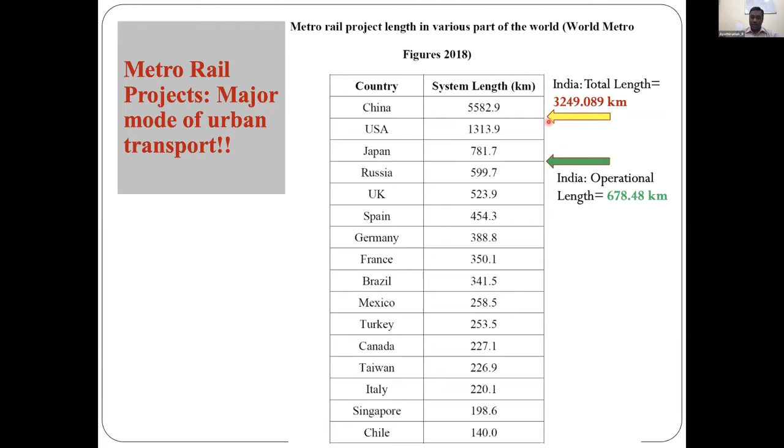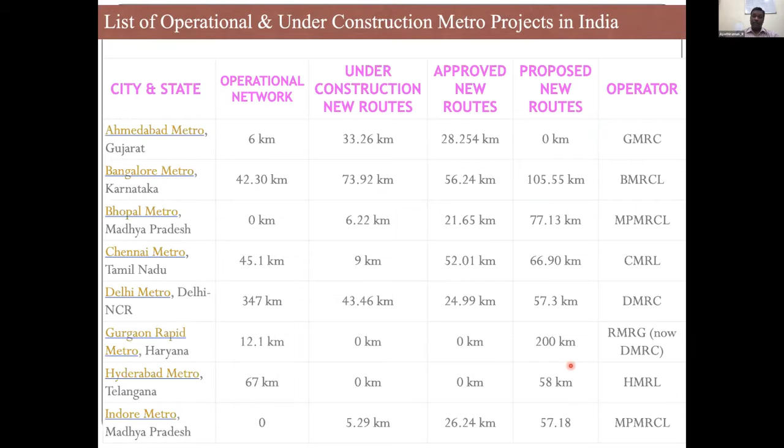This is the table summarizing what is operational and what is under construction in several metro cities, and the approved and proposed ones. I think the government, even in the recent planning and budget, you can see a huge amount of fund has been diverted for metro construction. These are different cities showing the status of the work, and some of these cities are going to be having metro projects for the first time.

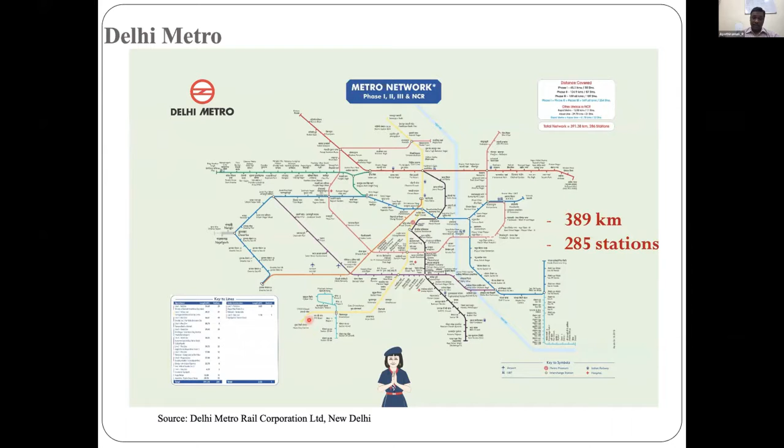So in Delhi, very successfully it is functioning. 389 kilometers of metro is functional, and especially there are several lines where underground tunnels were constructed. These metro transport systems can be elevated or underground. I think elevated is the very convenient way of construction, cheaper, whereas underground construction is the most challenging. But it is unavoidable to have underground metro construction because you can see very densely populated residential areas, so obviously you have to take this metro underground, below these buildings.

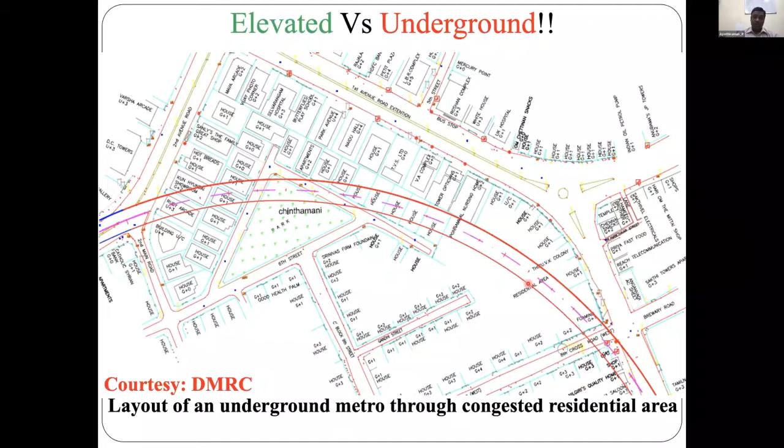The typical underground soil conditions require tunnels to be constructed either in soil or partly in soft rock conditions. In Pune, it is also constructed in hard rock conditions. So eventually, we are talking about tunneling in soil as well as rock conditions.

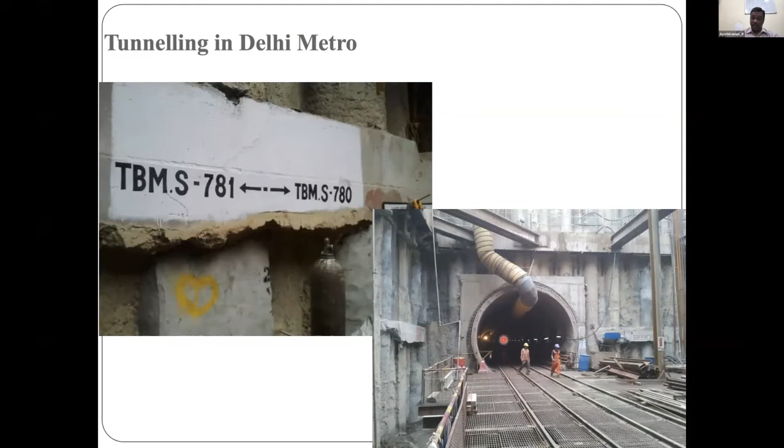This is some of the photographs taken during the site visit to Delhi metro constructions. You can see the portal, and from the portal, the tunnel construction is done through TBM. This is the TBM components, the face of the TBM, and a complete earth pressure balancing TBM is used. The complete tunneling is monitored by a computer control system.

It monitors what is the volume loss, how much face pressure has to be applied, and how much volume loss is happening. As a result, the settlements are to be monitored at the surface, and the segmental linings are to be installed by jacking.

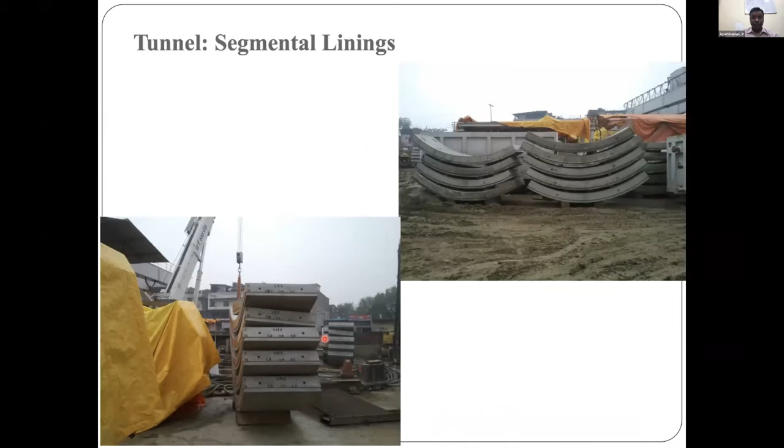So the major challenges we have in urban areas, since we are doing the tunneling underground, are that structures above ground and their foundations come in close vicinity, so we need to take care of their safety. There are two possible scenarios we can look at. One is during tunneling, how much damage would happen to the surrounding buildings and other subsurface structures and utilities, which we need to protect.

But now you can see so many projects have already become functional. The other possible scenario is that these tunnels exist, and these tunnel and metro alignments have become a major point of attraction, so a lot of future development happens close to this metro alignment. Eventually any new construction activity can also cause an effect on the performance of the existing tunnel. So we need to also assess and ensure the safety of the tunnels after construction.

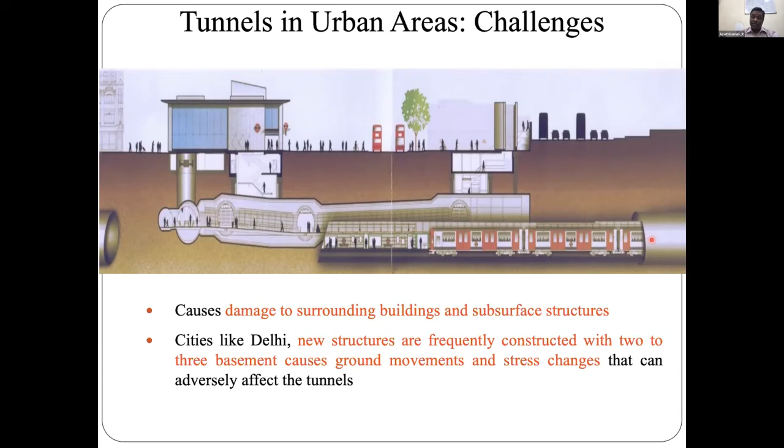And if these tunnels are located in a seismically active region, then their interaction under seismic load also needs to be understood and designed accordingly. Nowadays buildings with basements are coming, so eventually they will also come to relatively deeper depth and can have an interaction with the existing tunnel. So we need to study the interaction of the shallow foundation also, under both static and seismic loading.

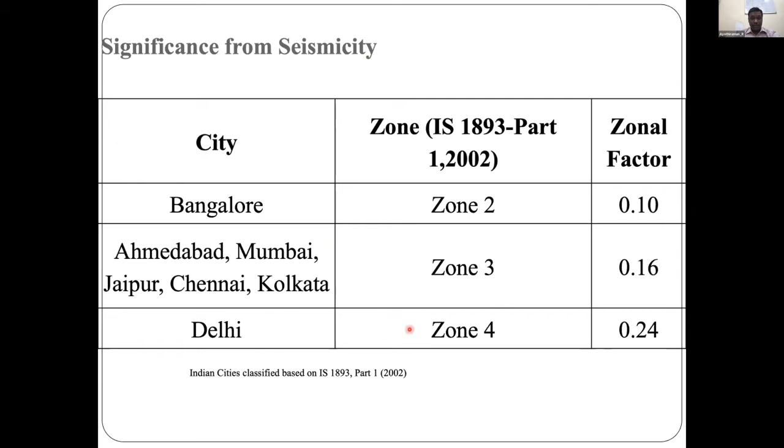All of us know in India what is the significance of seismicity. Some of the cities where metro are already functional come under zone 2 to zone 4. Delhi comes in zone 4 with a zonal factor of 0.24.

What is the current state of practice with respect to tunnel design and its relevance? Generally people assume that tunnel structures, underground structures, are relatively safe compared to surface structures when subjected to earthquake load. But this has become a question, because there are several case histories where earthquakes have caused significant damage to underground tunnels as well.

Let us see some of the case studies highlighted in the literature. It is reported that these are the parameters that affect the seismic response of tunnels: the relative stiffness of the liner and the tunnel depth, the peak ground motion parameters of the earthquake, and the duration and predominant frequency of the earthquake. These are the critical parameters affecting the performance and damage of tunnels during earthquakes.

There are 192 cases of tunnel failure that were analyzed and reported by several researchers, and we will see the summary of that.

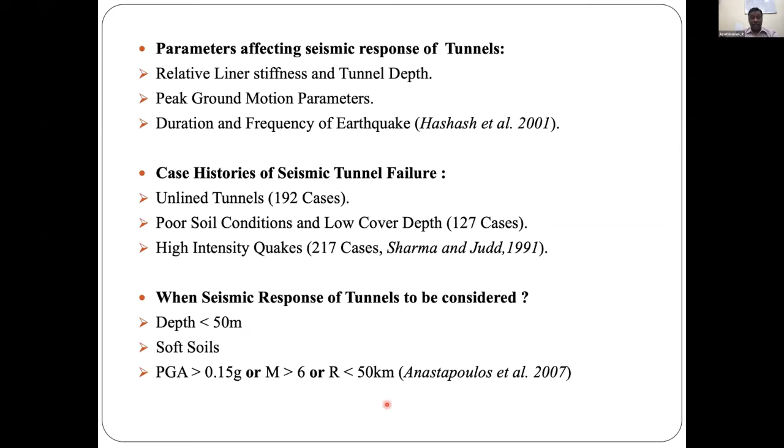Typically, when to consider the seismic response of the tunnel and take it into account in the design is whenever the tunnel depth is less than 50 meters, typically in soft soils, and if your PGA is greater than 0.15 G, or magnitude is greater than 6, or your epicentral distance is less than 50 kilometers, then we need to take into account the seismic design of tunnels.

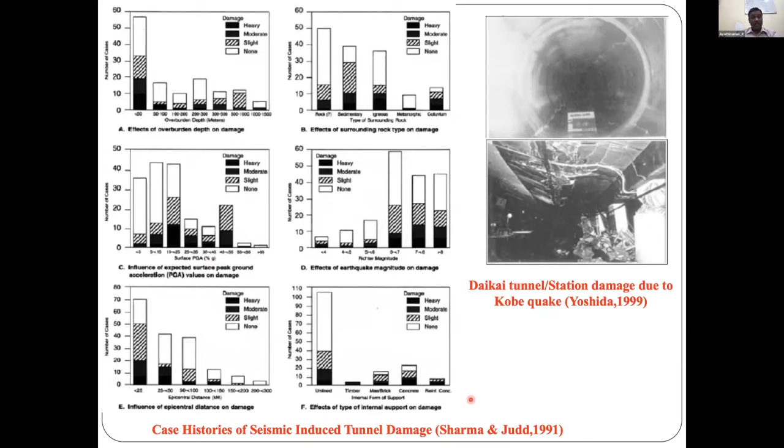These are case histories which were analyzed to find out the causes of damage, whether it is the effect of overburden depth, the effect of surrounding rock conditions, the magnitude of the earthquake, how it caused damage to different tunnels, and the influence of peak acceleration value on damage, and similarly epicentral distance. All these were categorically discussed by Sharma and Judd 1991. This clearly shows that tunnels do undergo damage during earthquakes, so we need to design them accordingly.

So this is what I would like to again summarize: what are the different possible interactions that can occur. Of course, when you construct a tunnel in soil, that soil-tunnel interaction needs to be understood even under static load. But metro tunnels are typically at close distance, they are twin tunnels, so therefore the interaction between the adjacent tunnel also needs to be understood, because the in-between soil, what we call pillar width, plays a critical role in affecting the interaction between the tunnels.

And of course, subsequently, there are other two types of problems. Type 1 problem is where a tunnel is constructed, then what is the response to the existing foundations? Type 2 problem is where the tunnel is existing and there are new construction activities, whether it could be excavation or foundation loading, and how they will affect the response of the existing tunnel. And of course, when in seismically active regions, how the earthquake loading needs to be considered.

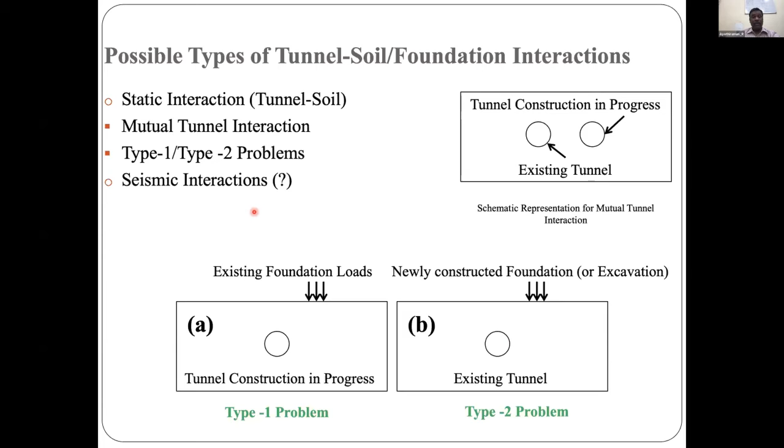So today's presentation, I will mostly focus on the seismic design related issues, not the static interaction part. The most common methods adopted in the analysis of underground structures are the quasi-static analysis, considering the free field method assumptions. There are also closed form solutions given by Penzien and Wang, which can be used for a circular cross section of the tunnels.

And of course, quasi-static analysis by the racking method, considering the deformations, can also be used. And obviously, we can do a numerical analysis incorporating this quasi-static approach as well. And then a time history full dynamic analysis can also be performed.

So today we will be discussing the case study of Delhi Metro, starting from a pseudo-static approach to quasi-static approach and then a full dynamic analysis. We'll be talking about how different methods can give different results and which one would be most appropriate to use. That's what we are going to discuss today.

Of course, in tunnel design, one important factor we need to understand is the flexibility ratio, because it represents the relative stiffness of the tunnel lining and the surrounding soil. So that plays an important role.

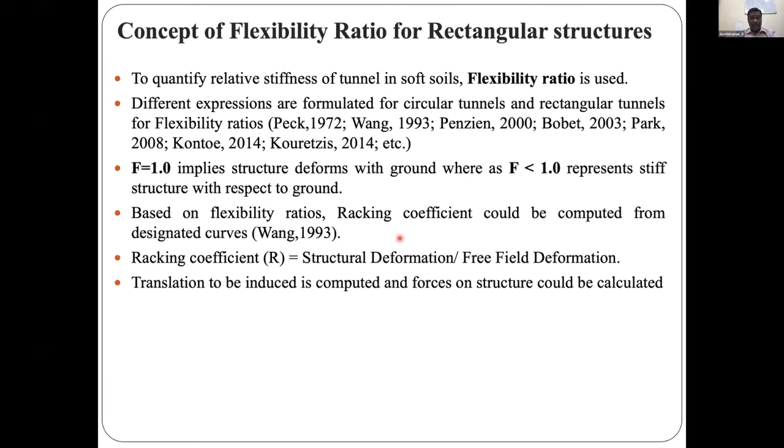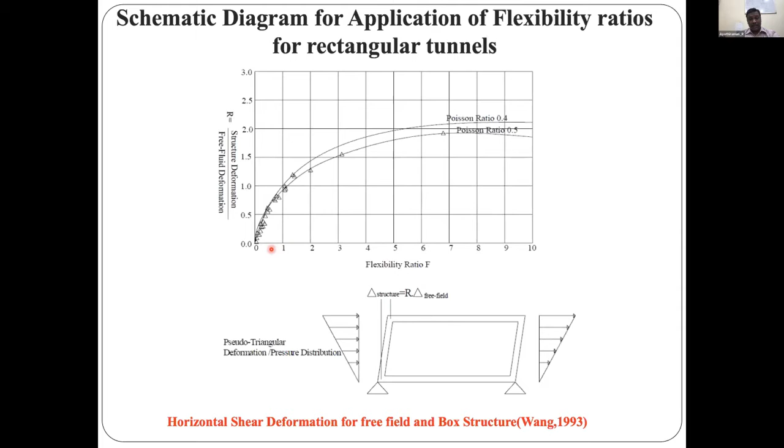In fact, a reduction factor or racking coefficient is applied when we do the analysis and design using the free field deformation approach. The structural deformation to be applied for the racking analysis is obtained by multiplying the free field deformation by the racking coefficient, and this racking coefficient is a function of the flexibility ratio.

Another challenge is the segmental lining being used, which has joints. What would be the effect of these segmental joints? For a realistic analysis and design, one must model in the numerical analysis the joint condition as it prevails in the field.

Nagar has actually done an analysis and found that joint stiffness does affect the moment and thrust mobilized in the tunnel lining. Therefore, in our Delhi Metro analysis, we did consider segmental joint modeling in the analysis.

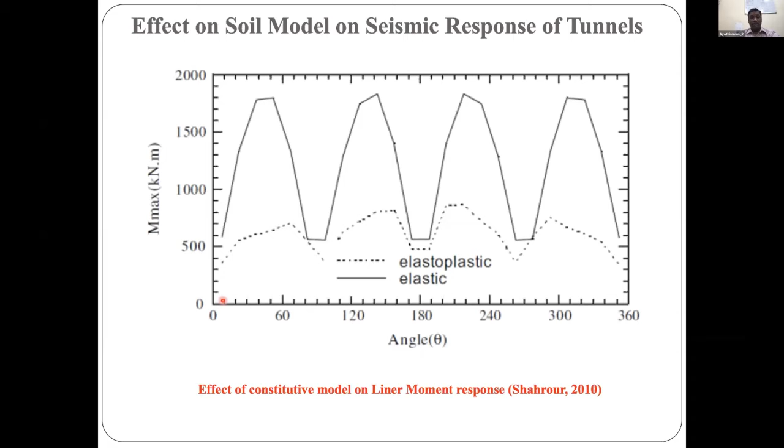Also, in soil engineering problems, simplified elastic analysis or elastoplastic analysis - the soil constitutive model - affects the final output of moment and thrust coming on the liner. So we have to choose very judiciously the constitutive soil model depending on the actual soil condition, to more representatively

model the behavior. Some full dynamic analysis results reported in literature show that as the PGA increases, both axial thrust and bending moment on the lining increase. But again, this thrust and bending moment need to be reduced depending on the flexibility factor, because flexibility is one of the important factors - they can be reduced based on the flexibility value.

Delhi, having certain parts with a shallow water table and sandy soil condition in the Yamuna River basin, is liquefiable. So we had to arrive at different constitutive models for liquefiable and non-liquefiable soil conditions. Again, these parameters have to be site specific, and for seismic loading we also have to get the damping characteristics to be very representative.

Of course, the challenges are how to arrive at the site specific ground motion characteristics, and how we are going to simulate the segmental joints in the modeling. Also, you should be able to ensure face stability, which is actually obtained in the TBM machine by applying appropriate face pressure.

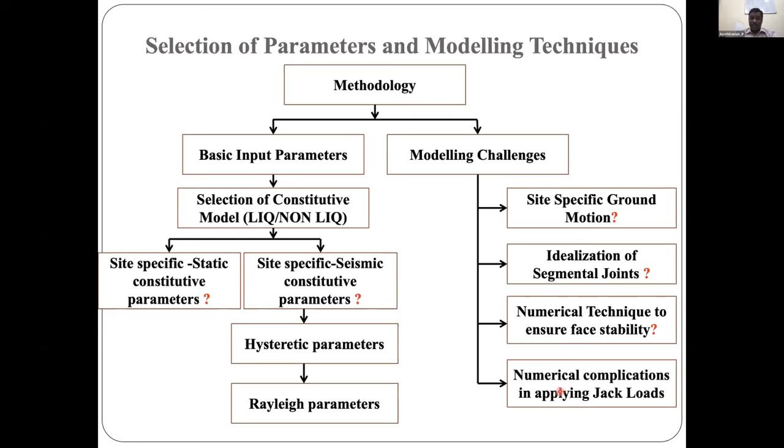So these are the things we have actually simulated as close to the field condition as possible in our analysis and design. Of course, we have to arrive at these parameters, because most conventional geotechnical investigation reports will have only SPT profile.

And we did have a shear velocity profile for the Delhi region at select locations, but if not available, then we have used correlations to convert from the SPT value to arrive at the shear velocity profile.

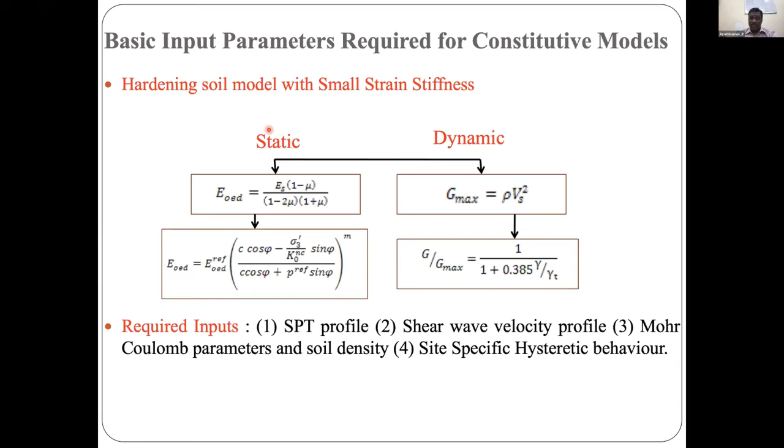So we have used the hardening soil model with small strain stiffness for Delhi soil conditions. The other dynamic characteristics were obtained from the Hanumantrao and Ramana equations, developed for the Delhi region. And the hysteretic behavior was assumed using the lower bound sand given by the Seed solution - these are some of the properties used.

So we have actually idealized the whole of Delhi into three types of idealized soil profiles for which we have carried out the analysis. Another thing is, instead of going for a zonal factor for a time history analysis, you need to get artificial ground motion which is synthetically generated.

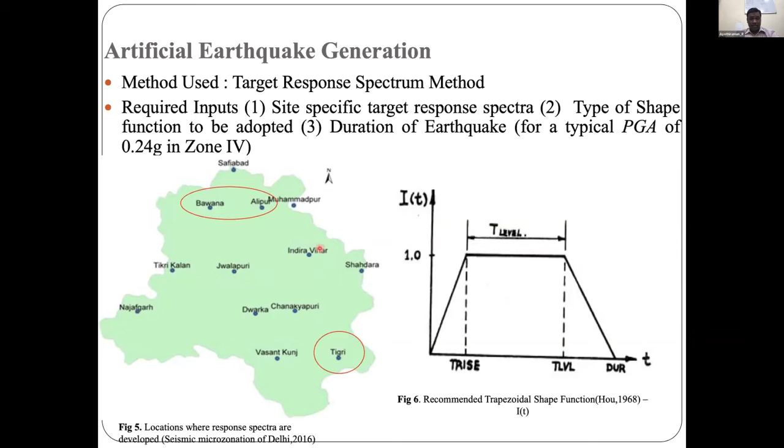So for that, we have used the target response spectrum method for developing a synthetic ground motion for the Delhi region. We have used the NDMA guidelines, considering the Bawana and Tigri faults, and developed the synthetic ground motion time history. For a particular target spectrum, we are able to closely match the ground motion giving the same response spectrum.

This synthetic ground motion was eventually used in the time history analysis. We can see how the face pressure needs to be obtained for different cover depths, because as the cover depth increases, typically the face pressure required to be applied increases. And when the face pressure increases, the face displacement will reduce. The idea is you should apply a pressure which will have a minimum face displacement, so that the volume loss is restricted to a limiting value, so surface structures are not affected.

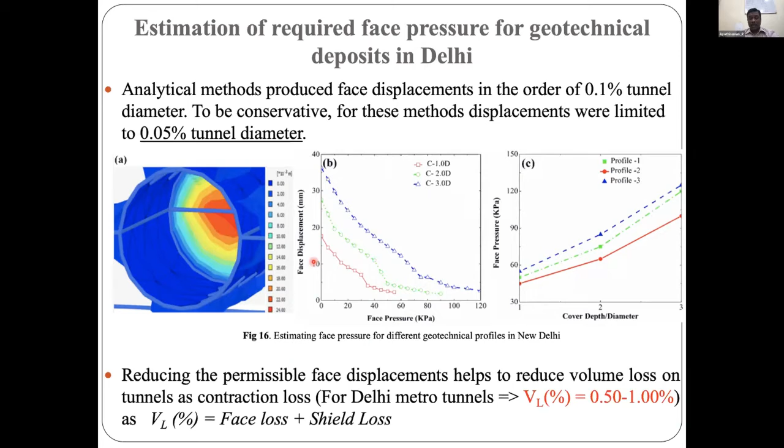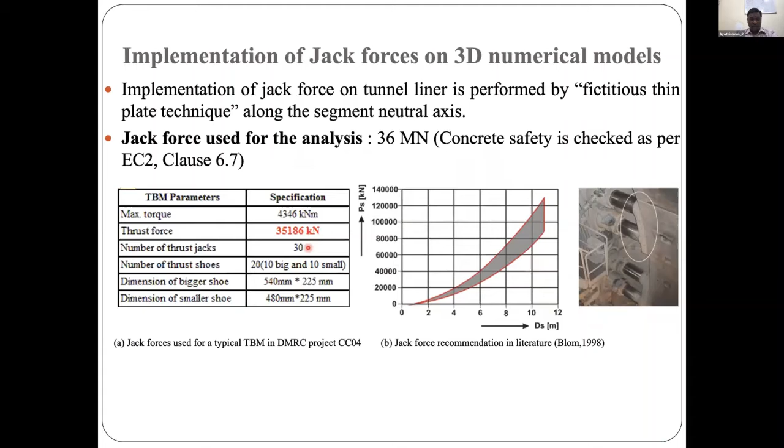The jack force applied in Delhi Metro was quantified based on the recommendations of Blom. We also verified how much jack force they are applying in the Delhi Metro conditions, which is almost 36 meganewtons.

We initially started with the free field analysis, and in Delhi, the bedrock varies from 10 to 80 meters, which is quite significant. Finally, we analyzed three different bedrock conditions. This shows the shear stress variation with depth for different bedrock conditions.

Again, for different ground profiles that we idealized based on a large amount of geotechnical data, we can see how the shear strain varies with depth. We can also see the spectral acceleration at the surface versus the spectral acceleration 7 meters below the surface. That's why the underground structures experience relatively less spectral acceleration.

That's why they are normally assumed to be safe. For the Delhi region, the actual acceleration based on the synthetic ground motion falls well within the design spectra. But this is for the free field condition.

The moment we bring in the tunnel and foundation system, they behave in a totally different way. So initially, pseudostatic analysis was done as per IS 1893.

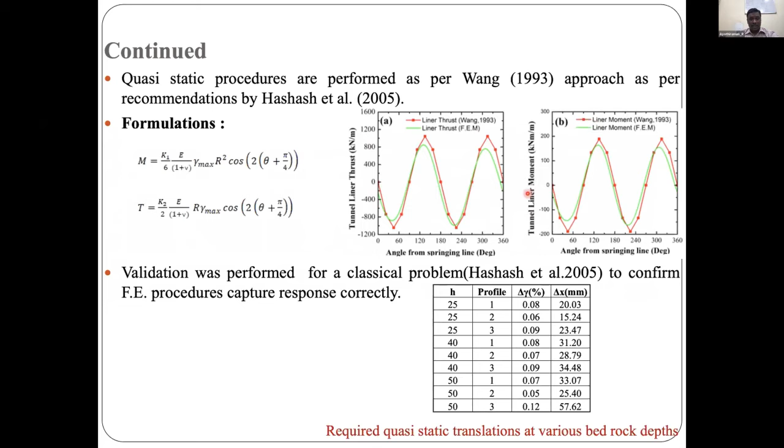We also did some validation problems comparing the Wang solution and the Hashash solution. We can see that the liner thrust and bending moment obtained were comparable with the Wang solution. This shows that the numerical analysis is capable of capturing the tunnel lining behavior.

You can compare the pseudostatic bending moment applied and the quasi-static analysis. We will always find that pseudostatic gives much higher bending moment. They always give very conservative forces.

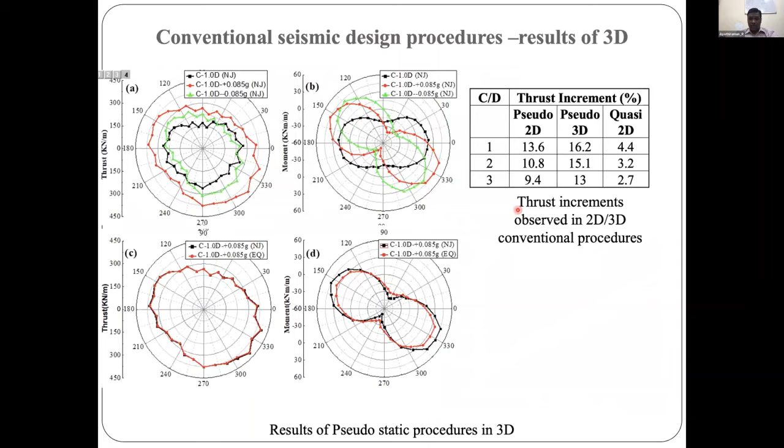But there are other challenges which need to be cautiously monitored, which we'll discuss in subsequent slides. We can see how the thrust forces using pseudostatic 2D and pseudostatic 3D can vary, but the moment we go for the other approach, it's relatively less.

Coming to the full dynamic analysis, we have to do the modeling as per the conventional explicit method of analysis, choosing the dimension of the mesh and everything. We can see the increase in thrust with time, but overall there is not much increase in the thrust force and moment considering the dynamic force.

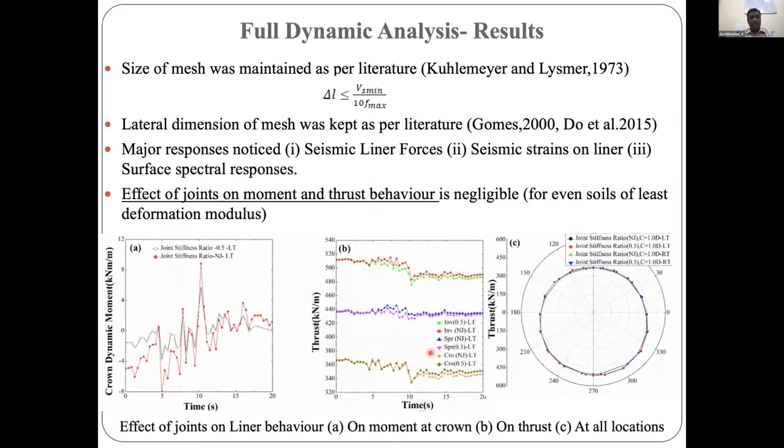Even the effect of joint stiffness is not significantly affecting the forces. So for practical purposes, the joint stiffness condition can be neglected for a quick analysis and design. You can see that the increase in thrust is hardly 3 to 5%.

But of course, when you do sequential tunneling, the variation for the two different tunnels is not the same. They have different forces, both moment and otherwise, not exactly the same. So you have to simulate the twin tunnel construction sequence in the modeling as well.

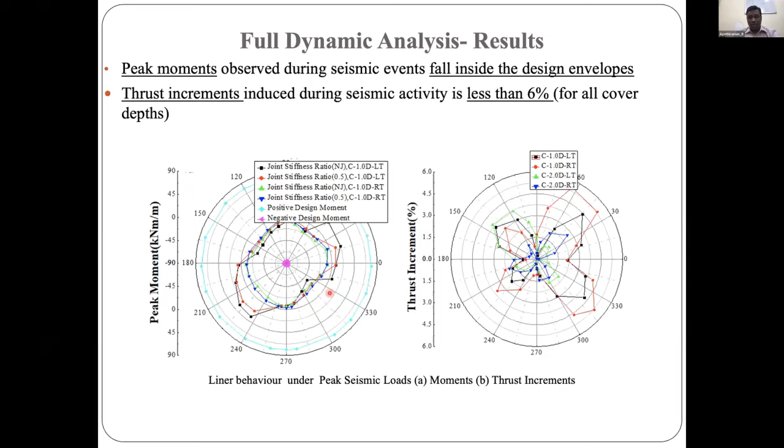So the major finding is that the strain level on the lining needs to be monitored. This is clearly seen for different cover depths. When it's a shallow tunnel, the strain on the left and right tunnels is well within the concrete limit. As the depth increases, they become comparable, and at a deeper depth, both left and right tunnel strains go much beyond the permissible limit specified by the IS code.

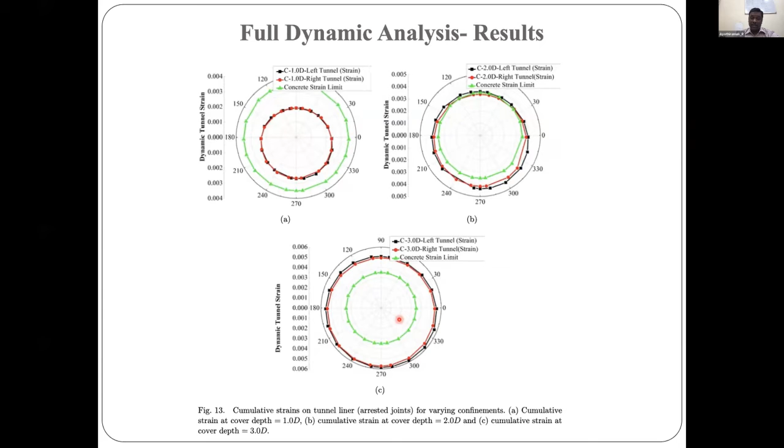So we have to be really watchful, depending on the geometrical conditions, about where to place strain monitoring. Whenever the strain levels are alarming, we need to determine what remedial measures should be taken. So this is something we need to worry about.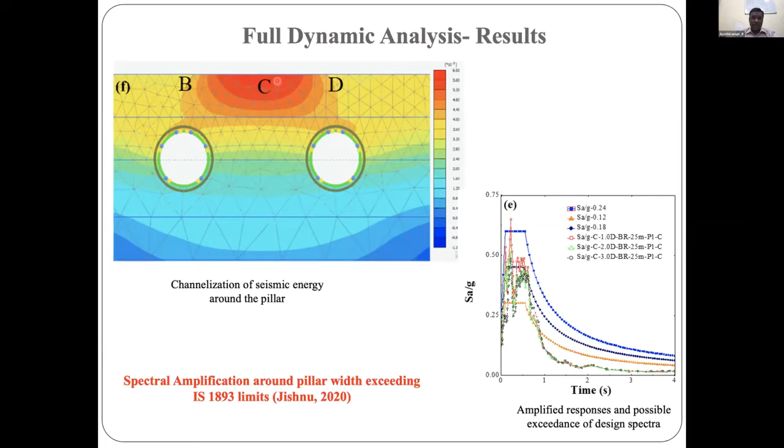Another thing is, while accelerations are well within the IS code specified spectral acceleration limit, under the presence of a tunnel there is channelization of seismic energy, and we find that the acceleration in the pillar width region has exceeded the IS code spectra. That means any structures located between tunnels need to be designed for higher spectral acceleration. If you simply follow IS code guidelines, they may be in danger. So we have to be watchful when designing structures in the pillar width region between tunnels.

We then went further to study the interaction of the tunnel-shallow foundation system, simulating different geometrical sizes and foundation aspect ratios. We can see that under the presence of a tunnel, since the tunnel is a stiff member, the load capacity increases, so there is an increase in bearing capacity.

So as such, if you neglect the tunnel, you remain conservative in terms of bearing capacity. But if you want to economize the design, you can always account for the presence of the tunnel and consider an increase in bearing capacity as well.

The only thing is, during excavation there is a sudden increase in settlement on the footing. But after the tunnel is constructed, there is again an increase in capacity compared to the load-settlement behavior without a tunnel.

So during tunnel excavation, one has to be careful that settlements don't increase excessively. But if the tunnel is already there and you're constructing a foundation afterward, we need not worry. The green line shows post-tunnel construction, where you can see how the bearing capacity increases significantly compared to the no-tunnel condition.

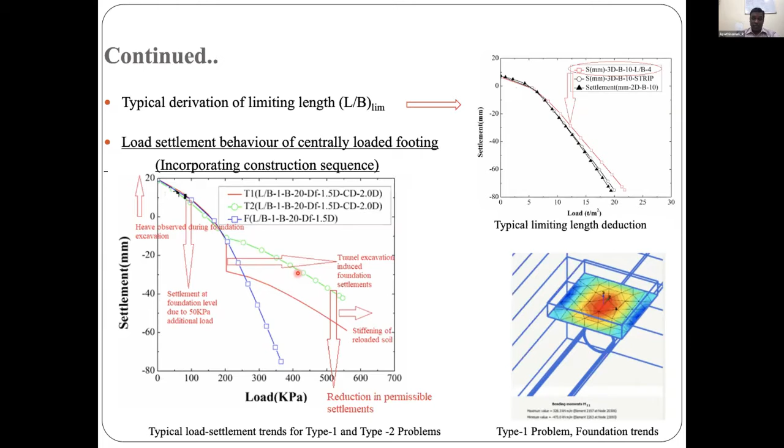So if you're interested in taking advantage of the tunnel, you can do that, but you need proper numerical simulation to estimate it. As mentioned, the bearing capacity increase is a function of the depth of foundation as well as the geometry of the foundation. But by and large, a 40 to 60% increase in bearing capacity could occur because of the presence of the tunnel.

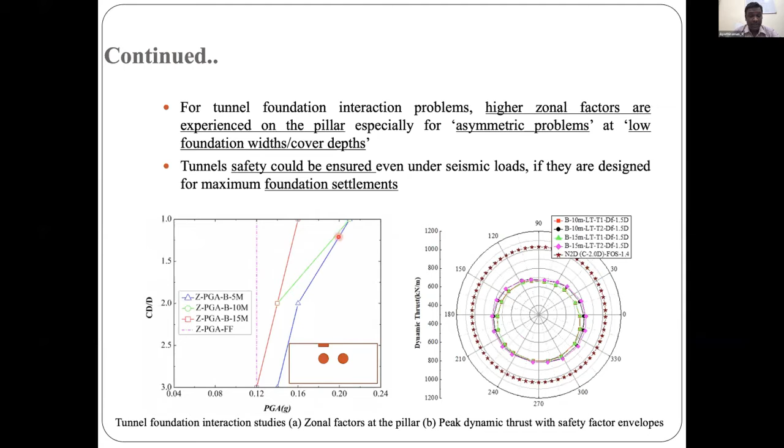When it comes to dynamic load, we can see that the free field acceleration is somewhere here. But when the shallow foundation is there, in the vicinity of the tunnel, we see that the acceleration gets amplified, especially at a shallow tunnel condition. You see that the maximum acceleration is there.

We also studied the tunnel-pile foundation interaction problem with no loading condition, meaning only pile and tunnel are present. We also considered vertical load on the pile, lateral loading on the pile, and pile group configurations, so different scenarios of field conditions were modeled. We assumed a 1 meter diameter pile, which is most commonly used these days, for which a permissible vertical settlement of 12 mm is used, and a lateral deflection of 10 mm is used. We had only modeled the pile up to the invert of the tunnel, because beyond which the load distribution goes much below the tunnel, so the interaction may not be significant.

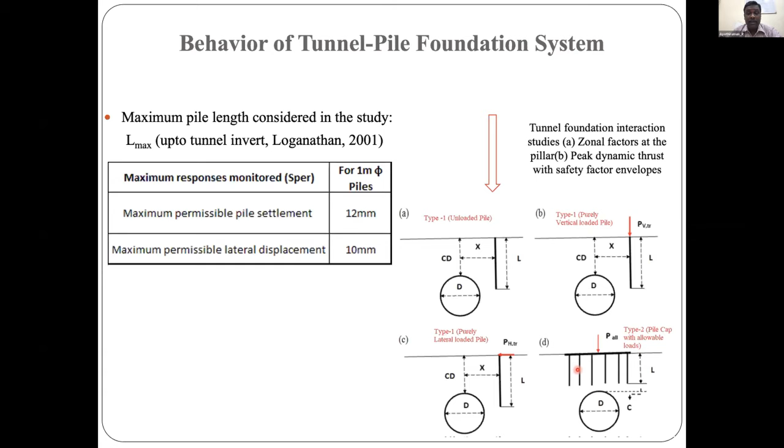Also, for seismic loading, for pile group, the permissible settlement of 25 mm as per IS code was used. We also did a validation problem by comparing field data reported on pile behavior. It is found that there is a large displacement around the pile and tunnel for a certain distance, and they are typically well within the 45-degree line from the springing line.

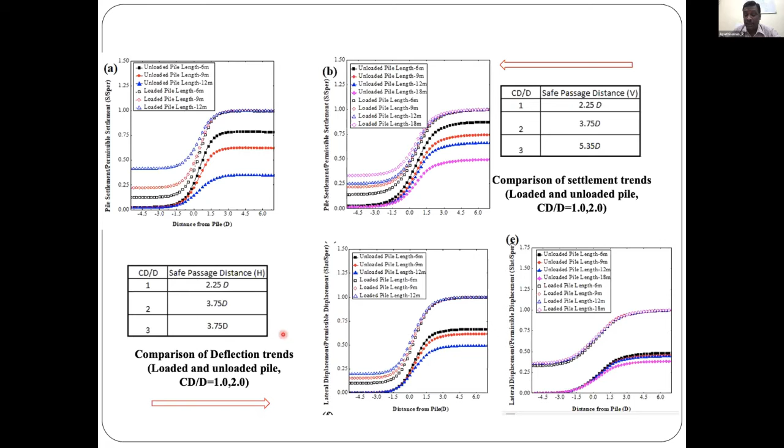We have plotted a normalized pile settlement curve with the distance from the tunnel, and distance between the tunnel and pile. We can see that when the distance is small, the deflection starts increasing, and then reaches the full settlement value. Similarly, for a loaded condition also, they reach the maximum settlement. So the critical distance for different cover depths was established. Obviously for a shallow depth, they reach maximum settlement at a very close distance. At a deeper depth, because of confinement, maximum settlement is reached relatively at a longer distance between the pile and tunnel.

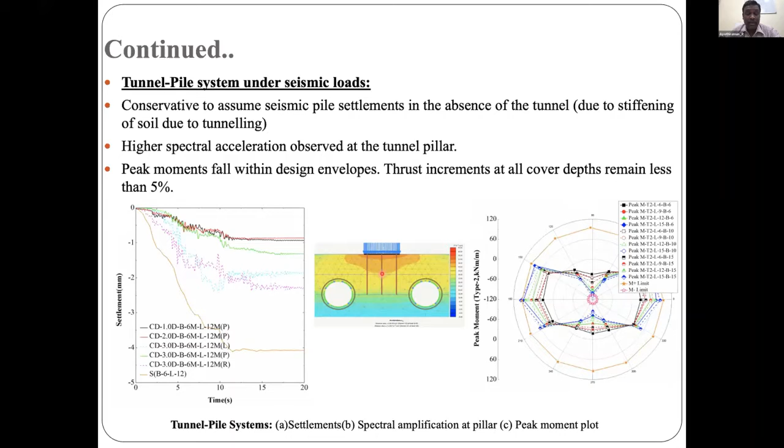The same channelization effect is happening. The spectral acceleration in the pillar width area is increasing. As a result, although settlement is less, the forces coming on the tunnel, the pile, and the pile group are increased. Therefore, we need to check the pile design for these additional inertial forces that are coming in the pillar width area, so that one has to check.

To summarize, we may use pseudostatic methods, which are most commonly used in industry, which may be conservative in giving the liner forces, basically thrust and moments. But the challenge is it cannot give the time variation of these forces, and especially strain and displacement, other things cannot be predicted by this method. So although it is conservative, with respect to deformation and strain, it doesn't give any information.

We may use the closed form solution as well for a typical cross section of circular tunnels by Wang, but the Wang method seems to give a better solution compared to the Penzein method. So for ideal cross sections, we may use the Wang solution as well.

Of course, the full dynamic analysis is always more rigorous, and it can simulate the realistic conditions and all the construction sequences. But again, your result accuracy is a function of how accurately you are modeling the site-specific ground motions, what appropriate constitutive model you adopted, and how accurately you have simulated the construction stages. Accordingly, your results will be varying.

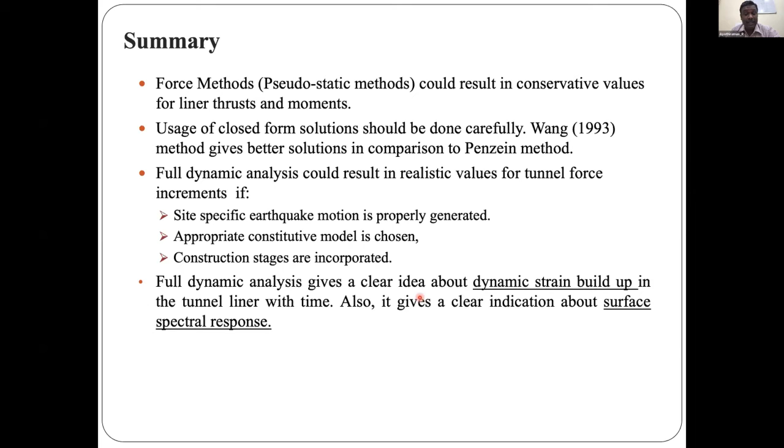But the most critical output that we have found is that the dynamic strain is actually increasing for certain geometrical conditions and loading conditions, which is really alarming. You need to monitor the critical sections identified, and finally, whenever the strains are increasing, we may need to go for appropriate remedial measures to be adopted.

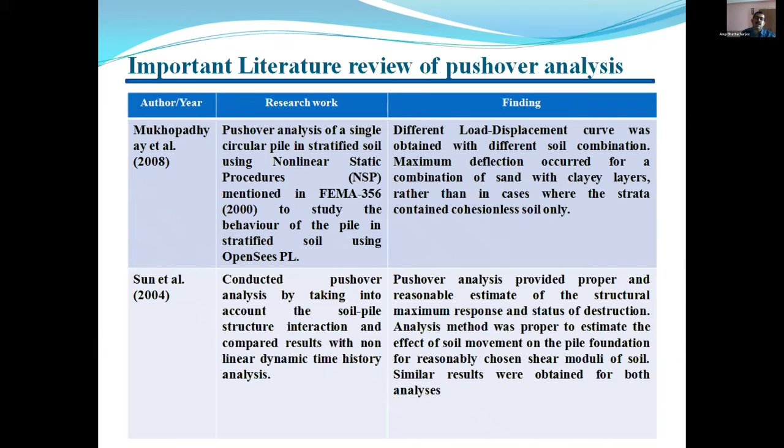Sun et al. compared pushover analysis and dynamic analysis, and found that pushover analysis gives a very good response compared to the dynamic analysis. Whatever response we obtain in the dynamic analysis, the pushover analysis also gives an almost similar type of response.

So based on that, we can summarize that numerical FE analysis can be used to find out the soil structure interaction mechanism. Using OPENSEES PL, we can determine this, and nonlinear static pushover analysis can be used to simulate the seismic design for pile foundation. Pushover analysis is a static inelastic nonlinear seismic analysis which can give the characteristics of the behavior of the pile foundation.

Based on that, the objective of our study is the dynamic analysis as well as the pushover analysis of the pile surrounded by different types of soil layers, and to check the accuracy of the response obtained from the pushover analysis compared with the dynamic analysis.

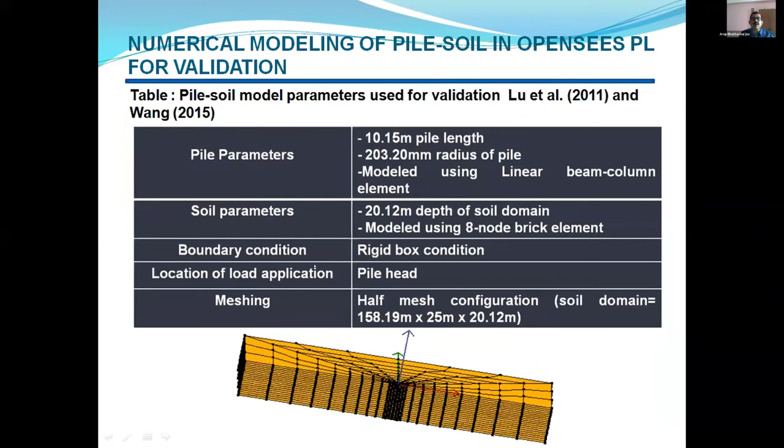In this study, we have considered the soil-pile interaction as given in Lu et al. 2011 and Wang et al. 2015, and these are the model parameters considered by Lu et al. Based on that, these are the model numerical parameters used for the simulation purpose, and we have obtained these validation results in OPENSEES PL.

We found that the results obtained from our analysis and the results given by Lu et al. are almost similar for the pile deflection as well as the bending moment profile of the pile.

Then we compared that with nonlinear and linear analysis by conducting nonlinear and linear analysis in OPENSEES PL, and we compared that with the results obtained from Wang 2015. We found that our results have very good accuracy.

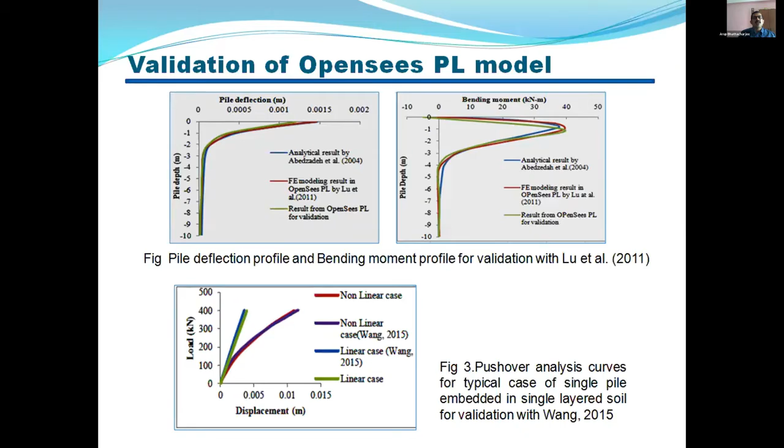Then we modeled different types of pile and soil. We considered a 10-meter long pile having a diameter of 0.4 meter and 0.8 meter, fixed at the top and the bottom. For modeling the pile, we used linear beam column elements, and for the interface, links are used to model the interface between the pile and the surrounding soil.

In case of the soil, we have used the 10-meter soil domain, and it is modeled as the 8-node brick element with the multi-material, and the different types of cohesionless and cohesive soil are taken into consideration for this one.

Now these are the different soil-pile interactions, meaning the different soil layers considered for finding out the soil-pile interaction. There are two layer systems, with layer 1 and layer 2, and there is also a 3-layer system. In the case of the 3-layer system, the thickness of the top layer is considered as 2 meters, the middle layer as 6 meters, and the bottom layer as 2 meters.

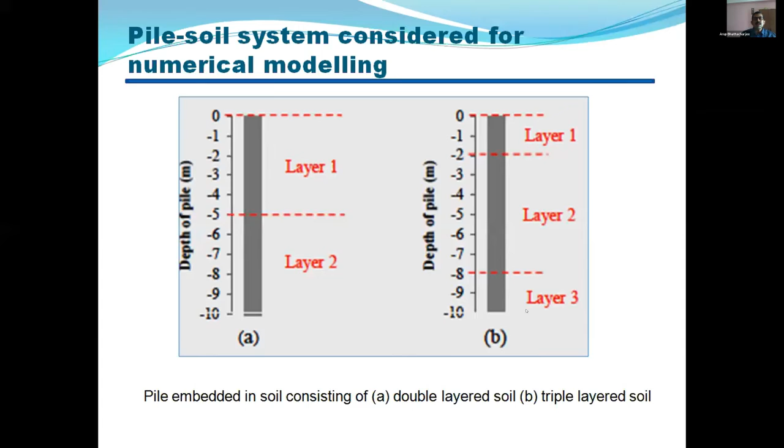And these are the different combinations of soil surrounding the pile by considering layer 1 and layer 2: cohesionless dense sand, cohesionless cohesive medium soil, and cohesionless loose sand. We have considered different types of soil, and these are the combinations we used for our study.

We conducted the dynamic analysis by applying a peak ground acceleration of 0.3g at a frequency of 2 Hz in the longitudinal direction, considering 10 cycles, which represents almost a magnitude of Richter 7 as per Seed and Idris, 1971.

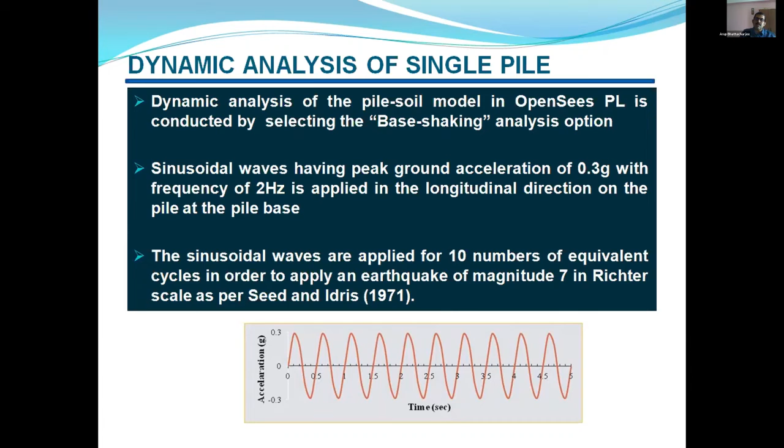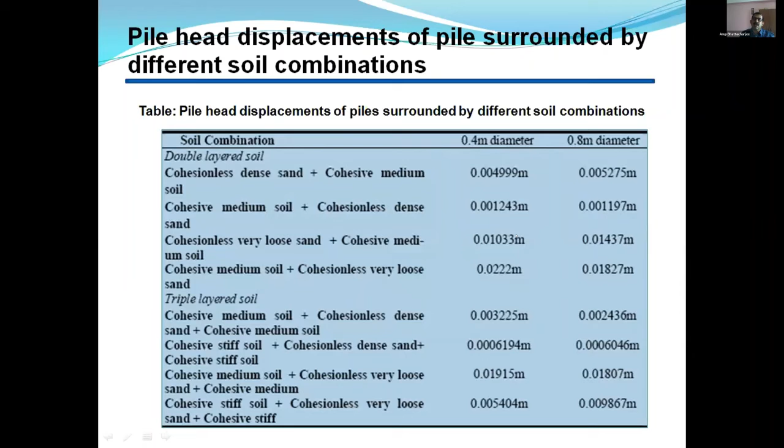Now these are the pile head displacements obtained for the different types of soil, for different pile diameters of 0.4 meter and 0.8 meter, obtained from the dynamic analysis. Then we tried to determine the bending moment also along the depth of the pile.

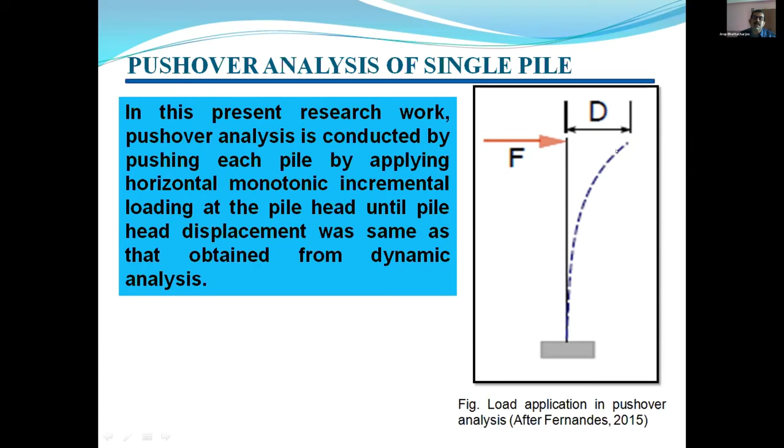So in this way, for the different soil combinations, we obtained the maximum bending moment from the dynamic analysis and from the pushover analysis. We found that with changes in soil combination and soil type, the maximum bending moment generated in the pile varies in both the dynamic and pushover analyses.

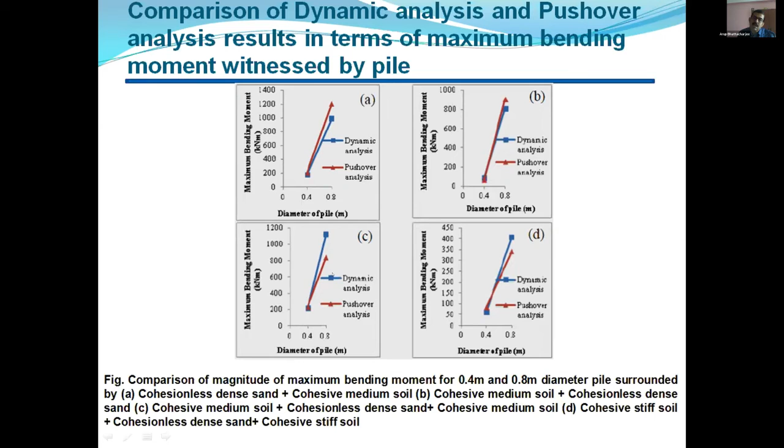These are also the results for the 3 layers of soil, showing the maximum bending moment generated in the dynamic analysis and the pushover analysis. From all these analyses, we found that the maximum bending moment is affected by the layer combinations as well as by the soil type. That means if there is loose sand, the maximum bending moment will be different.

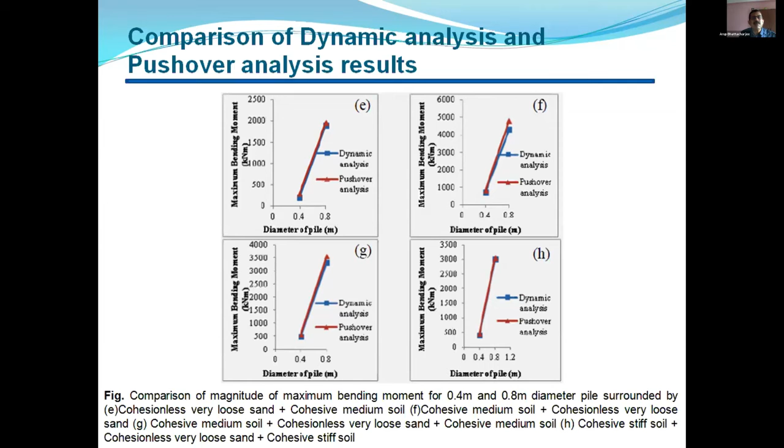If it is a dense sand, then it will be different. We have found that the pushover analysis can predict whatever response is obtained in the dynamic analysis. Pushover analysis of the pile can predict almost similar type of response that can be obtained from the dynamic analysis.

These are the yield moments obtained for the 2-layer soil, and from that we try to find out the location of the yielding zone where there will be maximum yield moment. Based on that, for different soil combinations, we try to locate the yielding zone, and this is for 2 different types of soil layer.

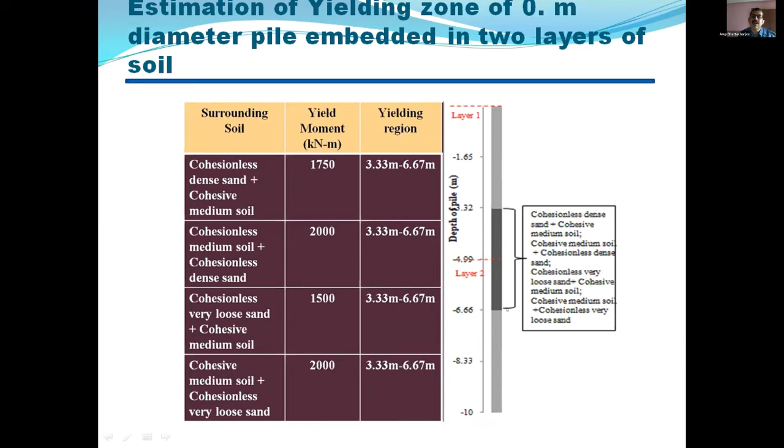These are the combinations given here. We have obtained that it varies between 3.3 meters to 6.67 meters. That means maximum yielding will occur within this range.

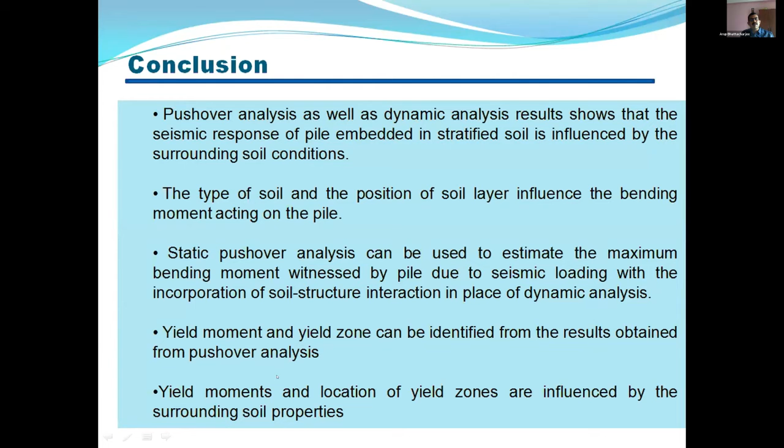So based on that, we can conclude that the pushover analysis can be used to predict the response obtained in the dynamic analysis, and based on the pushover analysis we can determine the yield moment and the yield zone. This yield moment and the amount of yield zone is affected by the surrounding soil type. Thank you, sir.

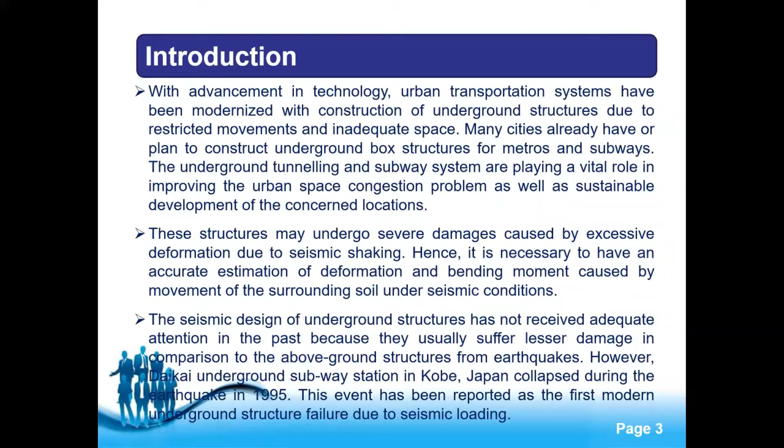This event was reported as the first modern underground structure failure during seismic loading. Later on, there were many more instances of severe damages. Among them, few significant ones are the Loma Prieta earthquake 1989, Kobe earthquake 1995, Chi-Chi earthquake 1999, and Tohoku earthquake 2011. So it is very important to examine the performance of underground structures against natural hazards like earthquakes because of their importance for saving life and economy.

In my present study, an attempt has been made to carry out a parametric study of a typical cut and cover box structure, 9.6 meters wide and 5.8 meters high, situated at varying ground conditions like loose to medium sand, medium to dense sand, and very dense sand, at different seismic conditions - seismic zone 3, 4, etc. The outcome of each and every case has been tabulated and reported for further analysis, so that we can come out with some correlation and some conclusions.

Methodology. Seismic behavior of box structure basically adopts free field deformation or racking analysis. The term free field deformation basically defines the ground strain produced by seismic waves in the absence of excavations. Racking deformation of rectangular tunnels is generated basically due to shear distortion during the earthquake.

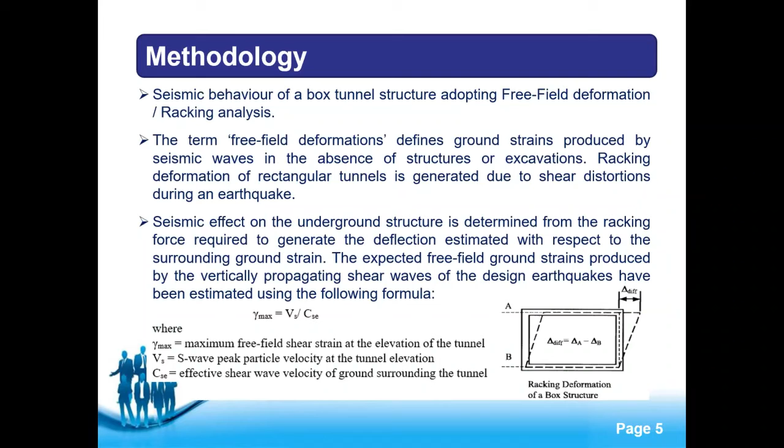Seismic effect of underground structure is basically determined from the racking force, which is basically required to generate the estimated deflection with respect to the surrounding ground strain. So the maximum ground strain, as we can see from the equation, is nothing but basically the ratio of peak ground velocity by shear wave velocity.

Ground condition up to the depth of the tunneling was mostly varied from loose silty sand to medium dense sand at different stages of the tunnel alignment. Also, Delhi lies in seismic zone 4.

On the other hand, a similar type of section at Lucknow Metro north-south corridor, from CCS airport to Munshipulia, has been further considered for analysis. Shape, size, depth, and surrounding ground condition are mostly similar for these two locations - Delhi Najafgarh corridor and Lucknow Metro CCS airport to Munshipulia corridor. The only difference is that Lucknow lies in seismic zone 3 and Delhi lies in seismic zone 4.

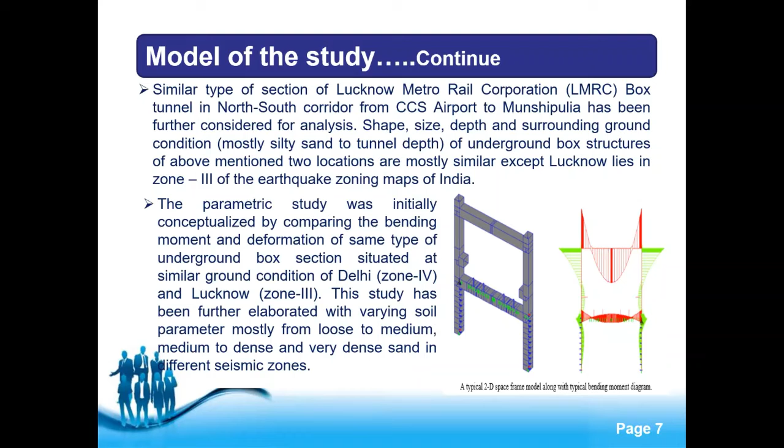The following three types of ground conditions have been considered during my study: ground condition 1 (GC1), loose to medium silty fine sand from ground level to a depth of 15 meters below the ground.

The second one is ground condition 2 (GC2), medium to dense silty fine sand, starting from 3 meters below the ground to 15 meters. Here the top 3 meters is basically loose silty fine sand.

Ground condition 3 is very dense sand, starting from 5.5 meters below ground level to 15 meters below ground level. Here the top 5.5 meters is basically loose to medium silty fine sand.

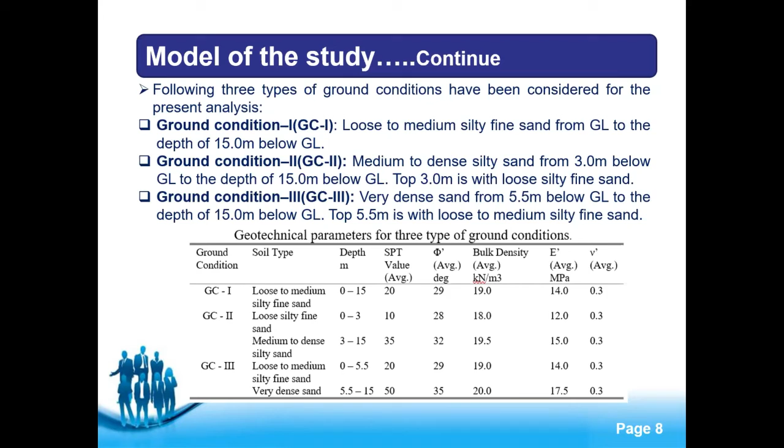Soil structure interaction has been considered by assigning linear springs with stiffness based on modulus of subgrade reaction as per IS 2950. During soil investigation, the actual water table was found at 18 meters below the ground.

However, during tunnel excavation, we could not find any water table. So cohesion of the Delhi and Lucknow silt was initially taken as 0, treated as cohesionless silt.

Vertical surcharge and lateral earth pressure have been calculated based on the adopted soil parameters for each ground condition, and applied in the numerical model to get appropriate loads, load combinations, and results. The internal analysis part of the parametric study has been conducted for 6 different situations, combining 3 ground conditions with 2 different seismic conditions.

That is ground condition 1, ground condition 2, ground condition 3, and two different seismic conditions: seismic zone 3 and seismic zone 4.

The different soil parameters combined with different seismic levels cause changes in the force application and deformation behavior of the structure. This has been tabulated, and we can see the data in the result and discussion section of this presentation.

Result and discussion: first is the comparison of racking deformation under different surrounding soil and seismic conditions — racking deformation of the underground box structure for 3 different ground conditions.

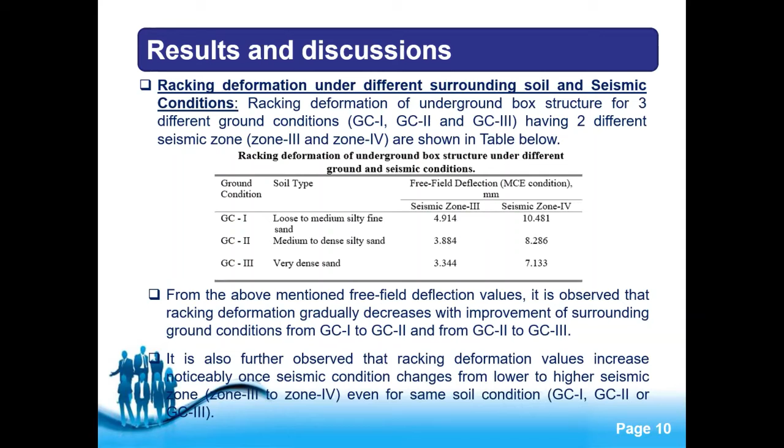The second comparison is the bending moment of an underground box roof slab for different surrounding ground and seismic conditions. In the table you can see the values shown at the wall.

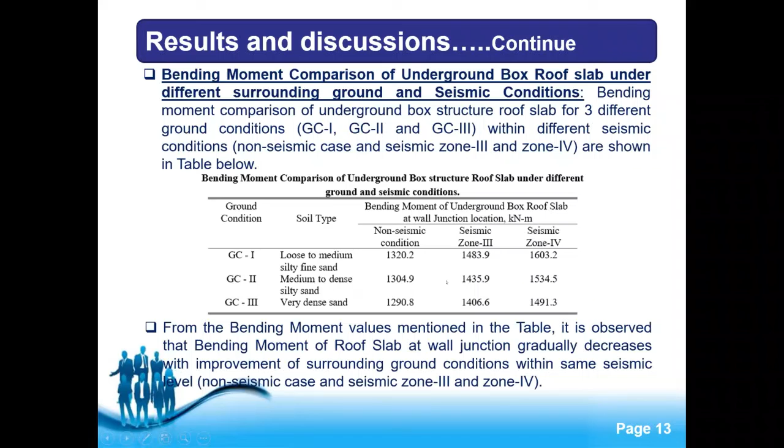You can see the bending moment getting reduced once the ground condition changes from loose-to-medium to medium-to-dense, and the bending moment increasing once the seismic level changes from non-seismic to seismic zone 3, and further from zone 3 to zone 4 — increasing significantly.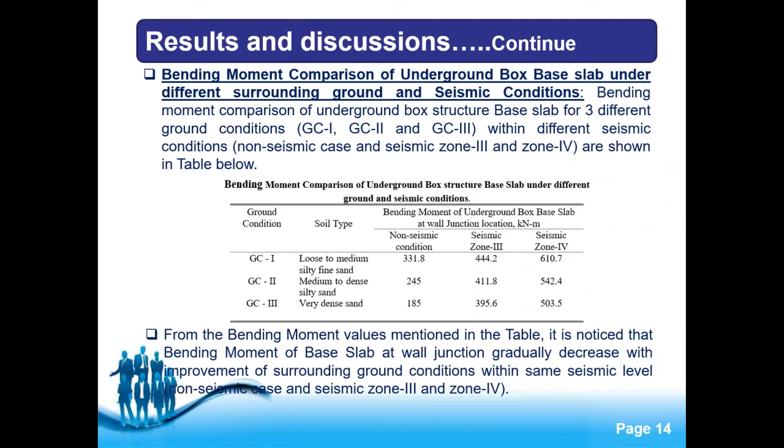So, conclusions: in the current study, a series of parametric studies were carried out to examine the full tunnel-soil interaction.

So from the present study, the following conclusion can be drawn. Deformation caused by the surrounding ground condition gradually decreases with the improvement of the surrounding ground condition. So with the improvement of the ground condition from GC1 to GC2, then GC2 to GC3, the racking deformation value basically reduced by 26% and further 16% respectively.

Racking deformation value increased significantly once the seismic condition changed from the lower to the higher seismic zone, that is from zone 3 to 4. We can see that the racking deformation increased by 113% also.

With the improvement of the surrounding ground condition, the bending moment at the roof slab at wall junction location is reduced by 1 to 5%, whereas the bending moment of the roof slab is increased by 6 to 12% once the seismic level changes from zone 3 to 4.

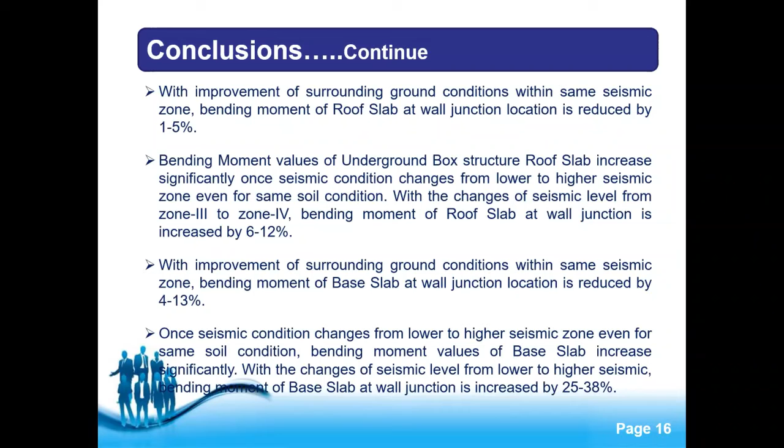The similar result we can see from the base slab. The bending moment value of the base slab is reduced by 4 to 13% once the ground condition improves. And once the seismic level changes from 3 to 4, the bending moment of the slab further increases by 25% to 38%. So bending moment value of the wall is gradually decreased with the improvement of the surrounding ground condition.

However, the behavior of the wall is not uniform, it changes at different locations. With the improvement of the ground condition from loose to medium, then medium to dense, and then very dense, the bending moment value reduced by 1 to 4% at the wall roof slab junction location. At the mid location, it is 17 to 31%, and at the base location, it is 17 to 22%.

Whereas the bending moment value at wall and slab junction location is increased by 5 to 11% once the seismic level changes from zone 3 to 4. And at the mid slab mid wall location, it increases by 5 to 13%, and at the base slab junction location, it increases by 23 to 32%.

So these are the outcomes of my study. I hope that this result will be helpful for practicing engineers during the design of cut-and-cover box tunnels for metros or subways. Thank you, sir.

Thank you for your nice presentation. So no question from the audience, but I have one small question. How did you consider any damping of the soil in your analysis?

Yes, sir. I considered the damping of the soil. How much percentage damping did you consider? Actually, it's 0.5, sir. 0.5. Okay, thank you for your nice presentation then.

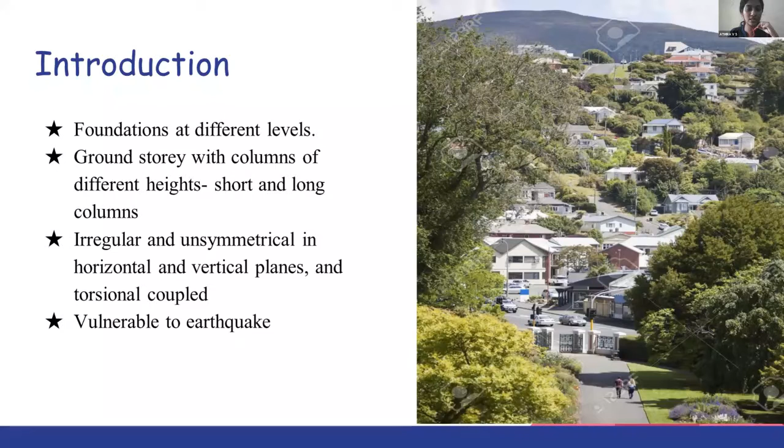The challenges are more when these buildings are located in earthquake prone areas, because the foundations will be at different levels in a hilly area, and the column heights in the same story will be different. That is, there will be short columns as well as long columns in the same building, and hence the building will be irregular in both horizontal as well as vertical directions. Because of this unequal column heights, the short columns attract more earthquake forces, as the short columns are stiffer. All these are the major challenges faced when constructing a building in a hilly area.

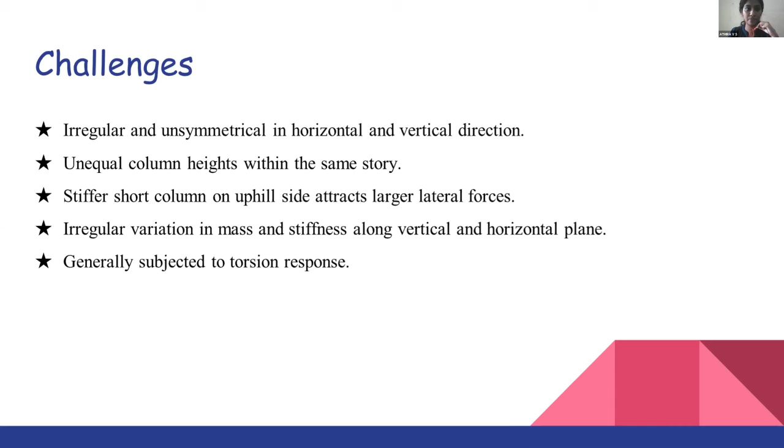Now, these are a few configurations of buildings in hilly areas: step back building, step back setback building, and steep slope building. In India, a few vernacular practices are followed, that is Dhajji wall, Kath-Kuni style and Thathara style in hilly areas. Even though these are very good in resisting earthquakes, the major problem lies in its raw materials, that is the major raw material is timber, which is not at all a durable material. It is much prone to termite attack and water attack, and hence the durability of these structures is reduced.

Considering all these difficulties, we set our objectives: to study the behavior of buildings in hilly areas during an earthquake. We provided base isolation to the building and analyzed it, then provided cable supports to the building and analyzed it, and compared the results with a building without any protection systems.

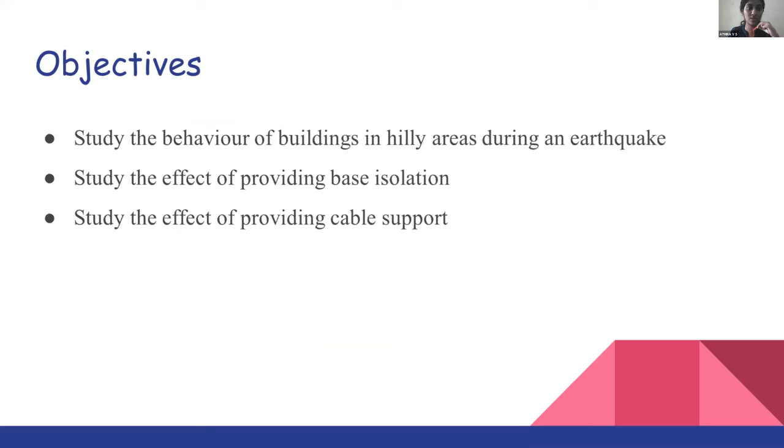Base isolation is the separation between the foundation and the superstructure using elastic systems. It enables the reduction in earthquake forces by increasing the time period of the structure. Cable supports are very uncommon in India, and there are very few such structures around the world.

Our methodology: we modeled a 5-storied building in a hilly area and subjected it to seismic loading. Then we provided base isolation to the same building and analyzed it, then provided cable supports and analyzed it, and finally introduced both cable supports and base isolator to the same building. All these results were compared.

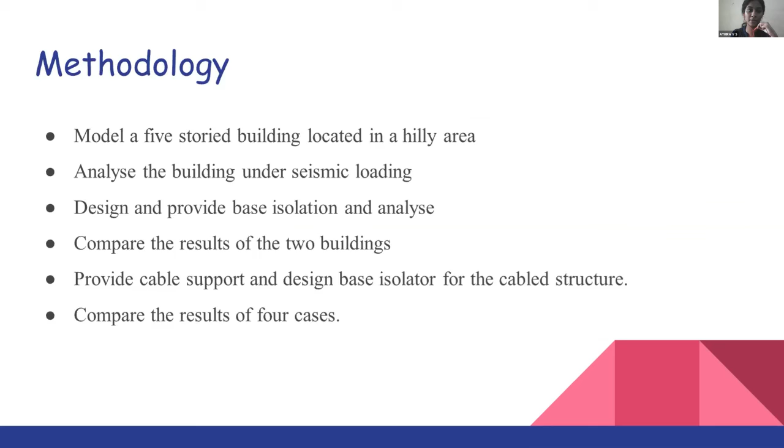I'll brief on our 4 models. Model A is the fixed base building without any protection. Model B is the base isolated building. C is the building with cable support, and D is the combination of cable support and base isolation.

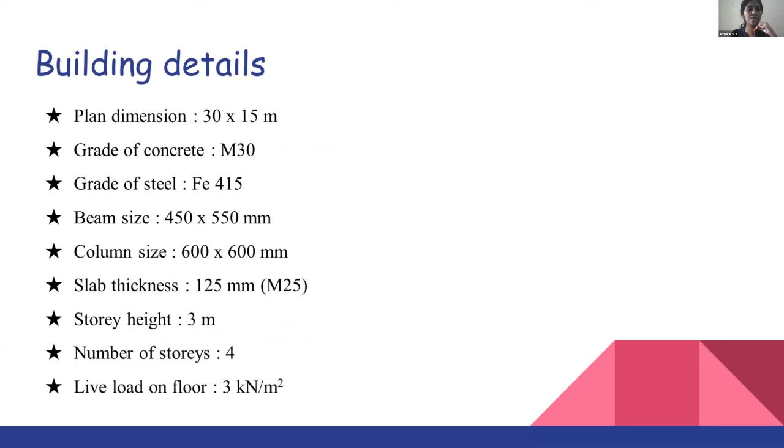In the structure we provided cable supports, and we found that the maximum reaction faced at each level was less compared to the base isolated structure. So the reduction in reaction actually reduced the horizontal and vertical stiffness required for the base isolator, which can reduce its cost.

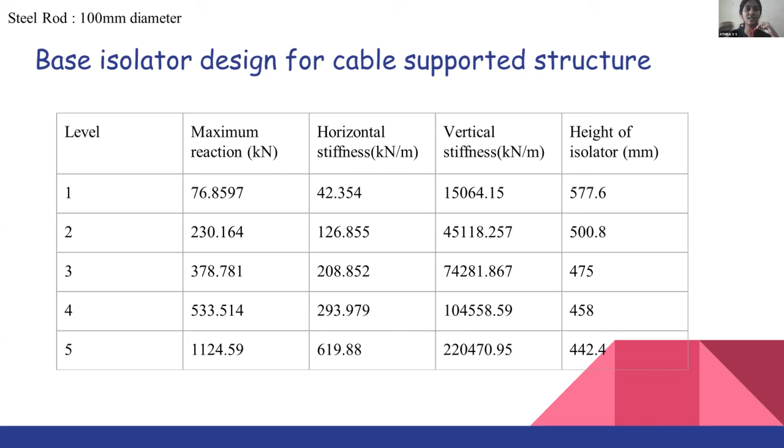Base isolators are very uncommon in India because of their expense. So when we introduced cable supports, they acted as a stiffener, which decreased the stiffness required for the isolators.

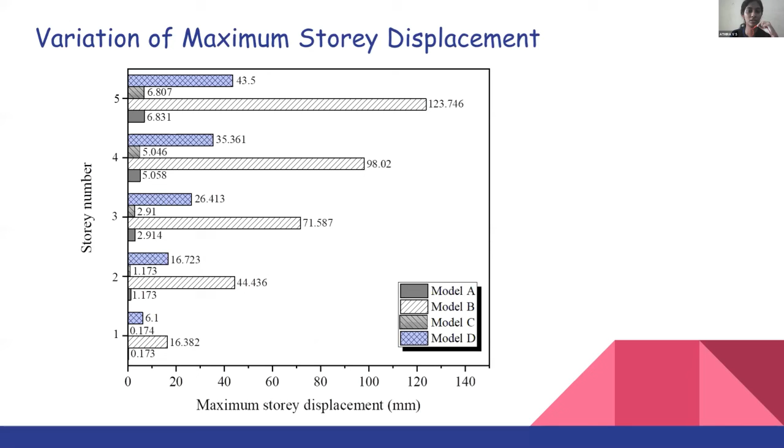Maximum story displacement was also observed higher for the base isolated structure, which reduced to some extent for the combination structure. For story shear, we got a non-uniform pattern because we had different plan areas on different floors. We got higher story shear for the fixed base building and cable supported building.

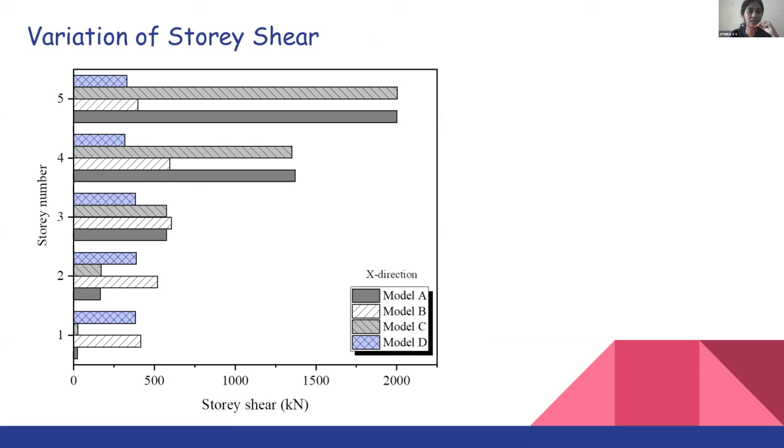The story shear decreased very much for the base isolated and cable supported buildings. Story acceleration is an indicator of the force acting, that is, the inertia forces, since force is directly proportional to acceleration.

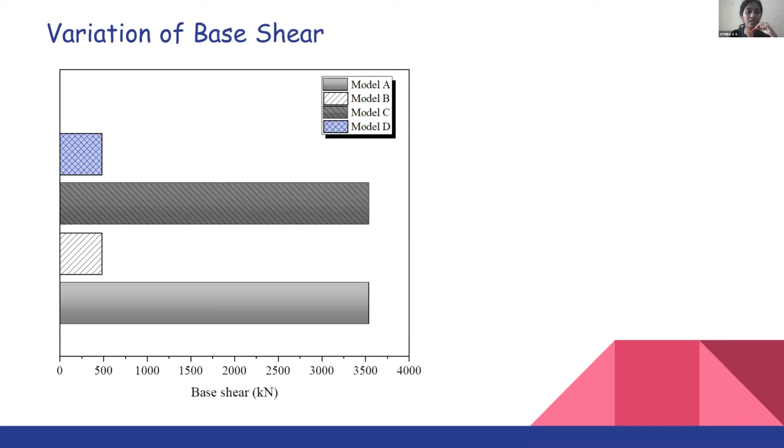Base shear is the lateral force acting at the base of the building, and this was reduced considerably for the base isolated as well as the cable supported combination building. Since the base shear and forces acting are less for model B and model D, the moment also reduced considerably for the same.

From these results, we can conclude that the base isolator provided building gave the better results, but cables can also be provided in such buildings to act as a stiffness provider, and hence the base isolator size can be reduced to a considerable extent.

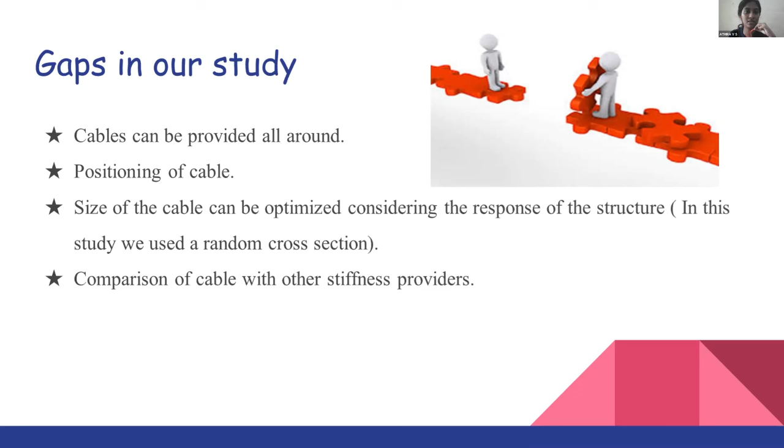A few gaps in our studies: we provided cables only on one side of the building. We can actually optimize the size or provide it anywhere in the building and compare the results. Other stiffness providers can also be used instead of cables, and the results can be compared.